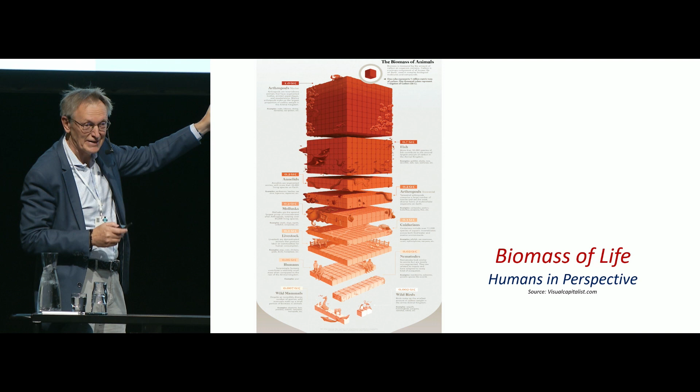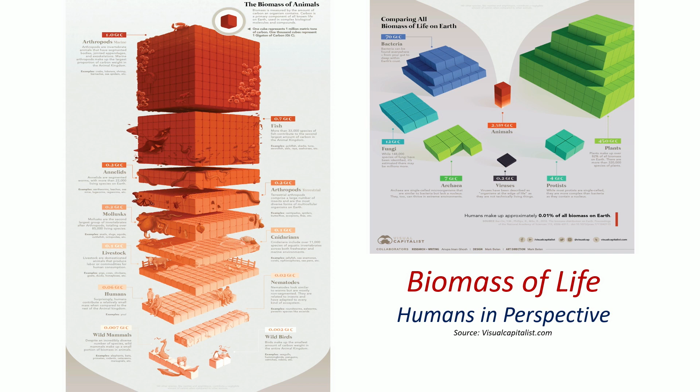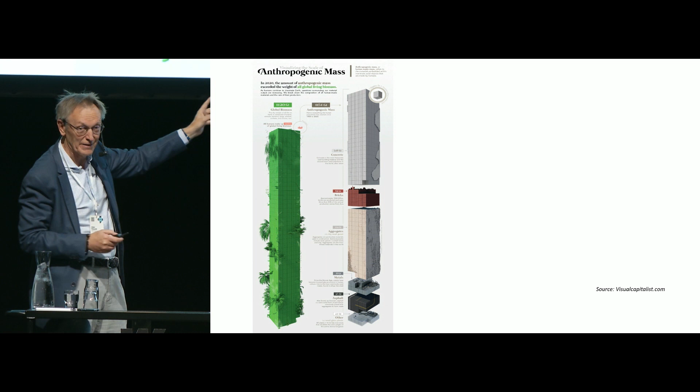This is the biomass of life. You see very clearly here how much is the biomass of humans, wild birds, wild mammals. But that's not actually what I want to show. If you compare it to the biomass of other living beings, fungi, archaea, viruses, plants, you see that animals, if we belong there, are a rather small part of that. But the core message I want to share is that if you compare the whole biomass of life with the anthropogenic biomass, that's the biomass created by humans, we are already surpassing that. You see here concrete, bricks, aggregates, metals, asphalt, and other. And by the way, the housing sector is contributing pretty much to that part of the story.

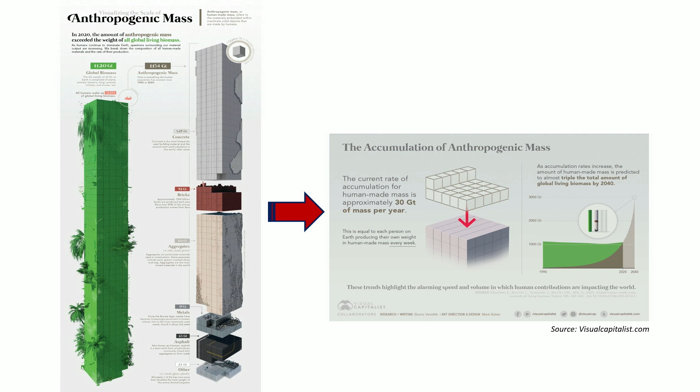If the trends continue, by 2040 we can expect that the right column will be 3 times the height of the left column. So we have all learned, and practically everybody has heard, about the doughnut compass for human prosperity.

We know that the inner part represents basic human needs, which is of course expanding due to economic development, and the population is also growing. The outer part represents the planetary limits, and we are surpassing those planetary boundaries.

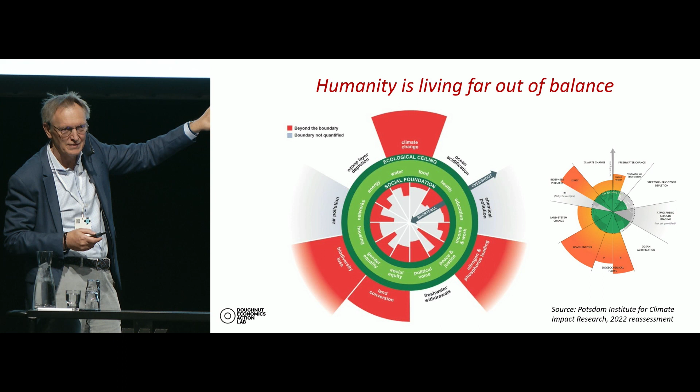The latest data actually show that things are worse than when this was initially identified. But if we look at it through the country story, the situation is pretty much different. You have countries like Malawi, which are far from surpassing planetary boundaries, but of course they are also not well meeting social needs. Then you have China, Belgium, Australia, where each country is basically overshooting the planetary boundaries more.

But let me now integrate that a bit into the story we are covering in the International Resource Panel. It's the story linked to natural resource management. When we say natural resources, what do we talk about?

Biomass, metals, fossil fuels, and non-metallic minerals - we call everything materials. So materials, it's everything extracted from the earth. And then on top of that, you have water and land. So that constitutes the story of the natural resources.

If we look to the trends, this is from the Global Resource Outlook 2019, then we can draw three simple conclusions. One is that global material use has more than tripled in the last 50 years. It has almost doubled on a per capita basis, which means the majority of the tripling can actually be linked to economic development, but of course the growth of population is also an important factor.

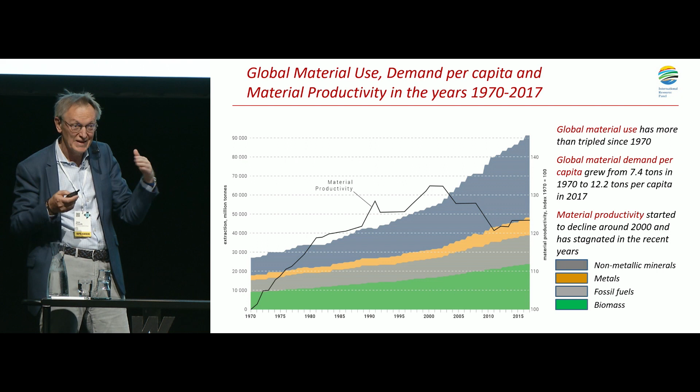Because there was a structural shift. The things which you are buying, wearing, were before more produced in resource-efficient countries, now like Europe, like Japan. Now they are more produced in resource-less efficient countries. And of course, this has consequences on the resource use.

So when we analyzed the impacts of materials in the value chain of extraction and processing, we found out that 90% of land-related biodiversity loss and water stress can be attributed to that. You can see here it's practically connected to the green part, so to the biomass story. Second, 50% of global climate change impacts and one third of the air pollution health impacts.

So if you buy a car, park it, don't use it for its whole life, you have already created one third of the pollution, because resources need to be extracted and the car needs to be produced. So if the trends continue, global material consumption is predicted to double by 2060 - so in less than 40 years.

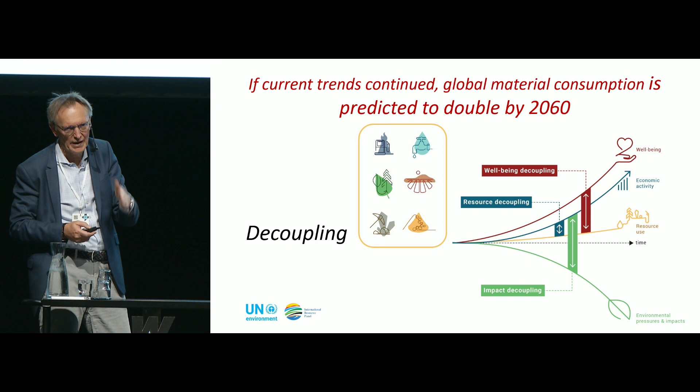That's why our conclusion in the IRP is very simple. We need to decouple - decouple well-being growth, economic growth from resource use, and both from environmental impacts. Which leads me to the conference, why we are sitting here. It's about circular economy, and circular economy is simply an instrument to deliver decoupling.

But you should also see it as a kind of normalization of our economics. So it's basically part of a bigger economic, societal, and cultural transformation. If we want an economy aligned with the European Green Deal and Sustainable Development Goals, it should be circular economy. None of the other economies actually fit into that.

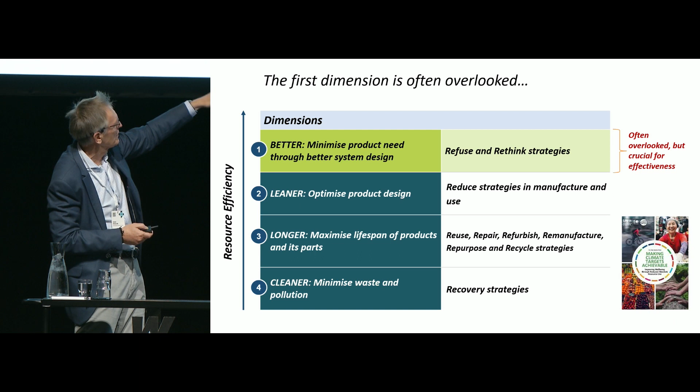When we look at circularity, we can see there are different layers of circularity and understanding. Everybody in the room has probably heard that when we talk about circularity, too many times we land in recycling. But there is more than that - you can go from repurpose, reuse, repair, refurbish, reduce strategies, then to refuse and rethink. So how can we basically do things differently, which is pretty much overlooked.

Since I started the whole story of circularity in the European Union, at least when it comes to political initiatives, our first initiatives were focusing on waste, pretty much how to improve that. Then the recent commission went to the area of products. We are not yet in the real system change, if we are honest.

So if I translate that to today's topic, managing waste related to buildings is our attention. Optimizing construction and building is in our attention. Efficient and balanced space and optimized building utilization - it's not yet. So we need to connect the things, we need to connect the questions.

And when we are doing that, one of the essential questions you should ask is: actually we don't need buildings, like we don't need cars. We need mobility, we need space to live. So it's really important that we understand, and that we design our thinking and logic, through human needs.

And those which are most resource intensive, those which are most impacting climate change and biodiversity loss, are nutrition, housing, mobility, and consumer goods. And then you have the supporting, very resource efficient systems which are enabling us, which use directly nature, energy, materials, innovation, digitalization - all that connected in a very important part. So built environment is part of the core problems which are causing climate change and biodiversity loss, full stop.

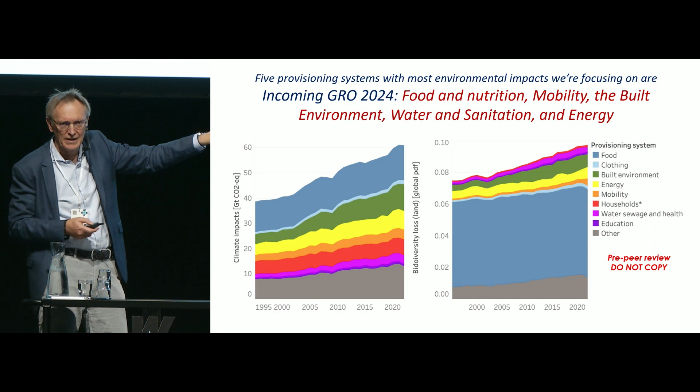And these are the last two slides. This is actually a teaser from an incoming report, the Global Resource Outlook. We will release it in the beginning of 2024.

We are not looking anymore through the sectorial logic. We are looking through the needs of humans. And we have modeled everything and connected everything. You can see on the left-hand side how the built environment, the green part, is contributing here to climate change.

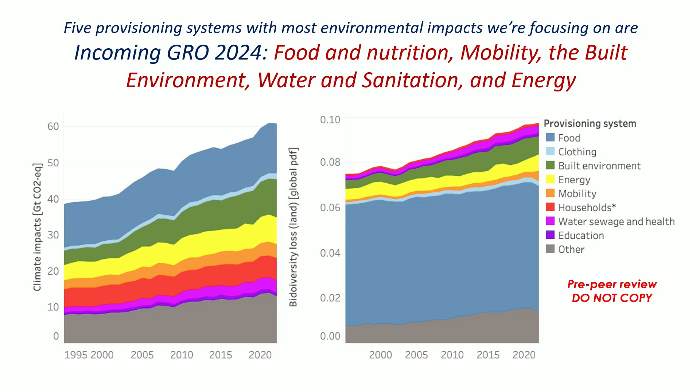What are the trends? On the right-hand side, how much it's contributing to biodiversity loss. If you look at the high-income country story, high-middle-income country story, middle-low-income country story, and low-income country story, we will depict the whole story of how things are connected to human needs and how it's connected to fairness and equity, and what needs to be done.

And Julia will now talk more about that, what could concretely be done in the housing sector. Thank you.

Wonderful, thank you Janez. So let's look more closely at the actual built environment. How does this logic apply? The essential question Janez leaves me with now is how to meet the essential human need of quality housing in the most energy and resource efficient way. And that's why we're all here.

It comes as no surprise to you that a fundamental solution in our mind is the circular economy, and the deep systemic circular economy, as Janez has just alluded to.

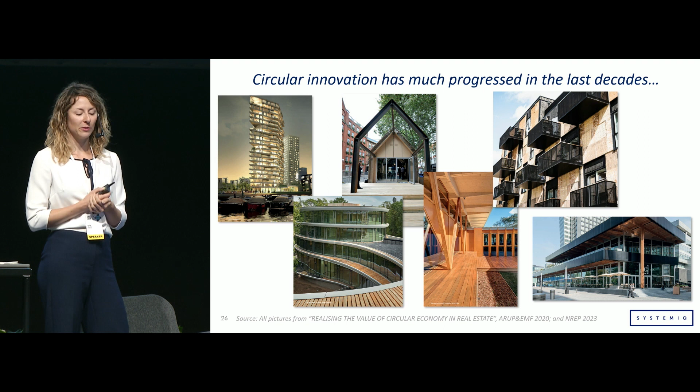The question is, though, if we have all these amazing innovations going on, and there are also statistics that show every dwelling is getting more energy efficient on average in every country in Europe - I'm not sure globally - why is it that overall, in this global view, housing is growing so fast in its resource use, actually growing faster than any other provisioning system or sector, however you want to see it.

So clearly we have two diverging trends here. We are making progress in circularity, and we need to acknowledge that. It's amazing what we're seeing, but it's not really hitting home yet, you could say. And I'd say there are two reasons - you can split that up into different categories of rationale, but it's basically scope and scale.

If we look at scale, we see that obviously it's not mainstream yet - it's not like every building, renovated or constructed, will incorporate all these amazing principles yet. I won't dive too deep into that because we have an expert on the panel, or several experts on the panel later, and the Arups and Metabolics and so on of this world really know all about this.

I will talk about the systemic scope that is missing. I think we have analyzed this in basically any climate policy, resource strategy, and so on, and we see investment strategies also very importantly taking up the logic that Janez just explained about the systemic view that now we need to apply.

And that is really right. It's those two dimensions, really, when it comes to better utilization. How do we get to build nothing? Doesn't sound very attractive, building nothing, but there's actually a lot behind that.

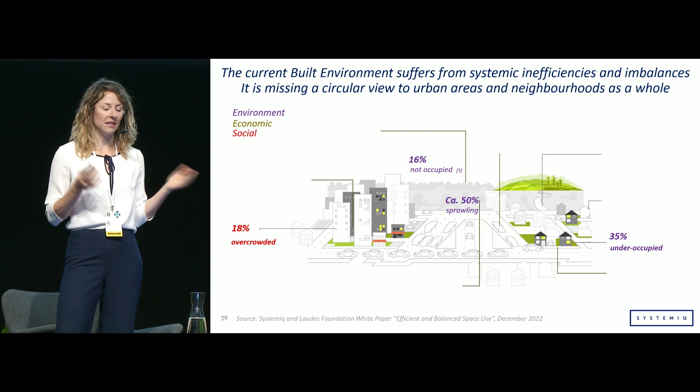So we see that a lot of our built environment is underoccupied, rooms are just not being used. Some is not occupied at all, it's vacant, maybe decaying. About half of our built environment is sprawling out, really inefficient in its composition. And then obviously that flips over on the other side, where we have overcrowding or missing houses, what we call the housing crisis. And that just causes a lot of excessive material and energy demand.

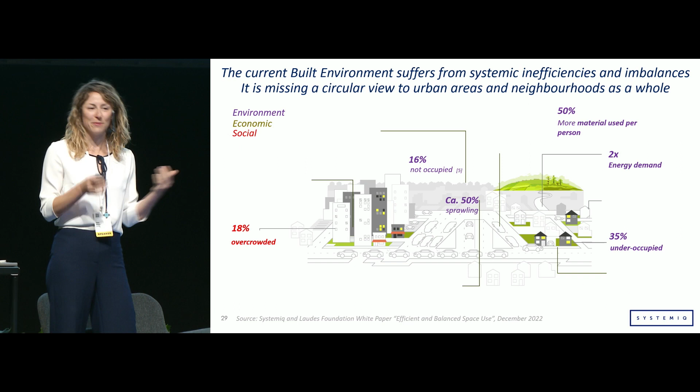We see that, for example, single-family housing areas use on average about 50% more materials and twice the energy, also because they're more underutilized, but it goes beyond just the buildings directly. It causes infrastructure that is much more extensive, much more material intensive. So roads and inefficient space use are up to 10 times the length, and this is European Commission statistics.

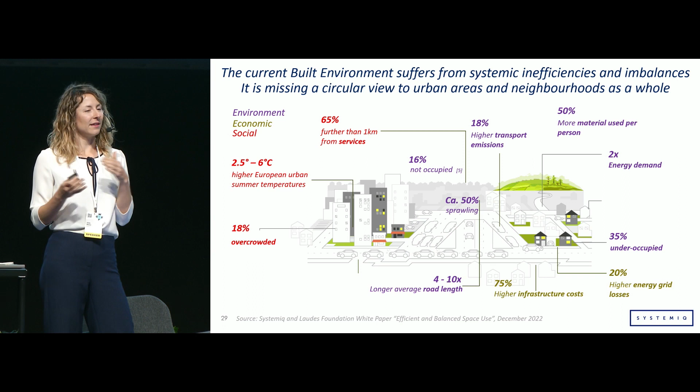It's not something we have measured, and that also causes social impacts. For example, a lot of settlements miss or lose the minimum density to have accessible services, which then causes more transport emissions and so on. So it's really about combining this utilization view with what I think is more classically perceived as circular construction.

What we have done is looked at if you applied sort of perfect circularity to every element on its own without improving the system, how far would we get? We modeled that for cement and steel and so on. I'm not showing all of that, to my great pity, because we don't have time, but it's actually interesting because you can really see the big emissions gap. You just can't get to the ultimate outcome without the systems view.

And then we applied the systems view and basically thought, okay, if we take what is going on now in terms of how we use space and utilize buildings towards a theoretical optimum, what would happen? We saw that you can save about 45% of annual construction emissions, so embodied emissions in road and building construction. And obviously that is something we need very urgently, because it's probably no secret to you that most of the materials used in the built environment are really hard to decarbonize or de-impactize in any other way.

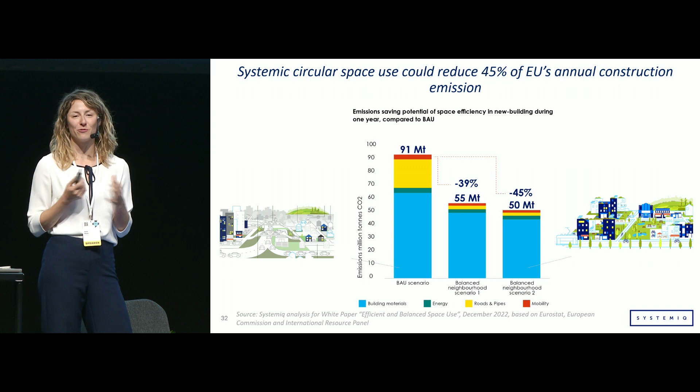It's really hard to make low carbon cement if possible at all. And it's also quite difficult to recycle it. So it's really about those other more systemic levers.

Luckily, even though they're not necessarily called circular, we could find quite a few examples where this is being applied quite nicely. So the more classical circular economy with that good space use, many of these examples are known to many of you. I think Switzerland, Barcelona, these are famously well-managed environments.

I think Freiburg is a very interesting example because this Vauban area is a suburban area which reuses buildings, but at the same time has this density and circular space use, repair cafes and shared shops and so on. So really a systemic view, which doesn't very often happen in suburban environments. We had trouble finding examples, so I think this is a very interesting one.

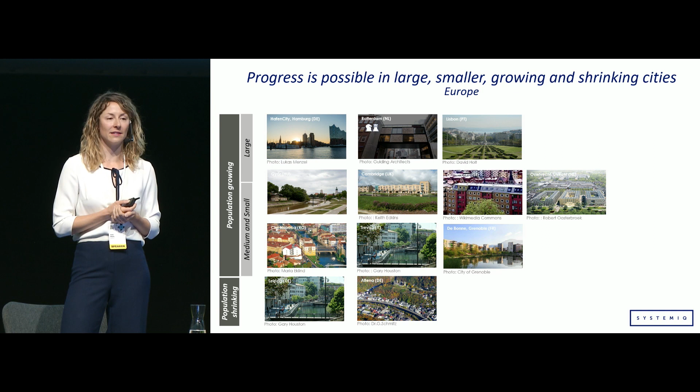And we found lots of other pocket examples all over Europe, and again, I look forward to expanding this example set a bit beyond Europe. None of them is perfect yet, but interesting enough to really get inspired and then also inspire our investment strategies, legislation, and so on. And wow, I have one minute left, so it's quite well timed.

I will end with this, but there's still quite a lot of information here. So the conclusion is obviously not to do either or, right? It's to do it together. And actually, we have seen in many examples that this more urban view, circular space use, and the more classic circular construction techniques, they can really boost each other. And it's really, while it sometimes sounds a little bit vague and big, when they go hand in hand, there is a lot of momentum being created.

Maybe to go into that for my remaining 40 seconds. So you see that many of the actions we need to do to boost circular space use are also probably very known to you as classic circular construction strategies, right? We are revitalizing city centers wherever compact living is already existent or has high potential. And to do that, we need a lot of urban planning and investment, things that go beyond the classic circular agenda.

But we also need the quality upgrading of buildings, the retrofitting, the repurposing of vacant buildings. There's a lot around upfill and infill of lower density areas, so they can become interactive, vibrant hubs. Someone made a fun calculation, and calculated how you could accommodate the whole of Brussels' projected future population on its rooftops through timber rooftop extensions, and that would apparently, space-wise, be quite easily possible without sealing any extra land.

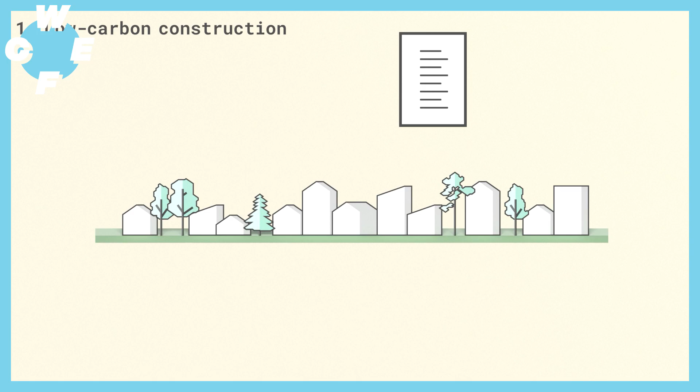In Finland, the new Construction Act enters into force in 2025. The Act promotes circular economy in the built environment in four main ways: low-carbon construction, life cycle quality, reuse and recycling, and digitalization. The new Act steers towards low-carbon construction by accounting for both negative greenhouse gas emissions and positive climate benefits throughout the life cycle of buildings.

In practice, the building permit application must include a climate declaration, which includes the carbon footprint and handprint assessment. Limit values will be set for carbon footprints for major building types. The assessment also includes embodied carbon, which will promote the use of reused and recycled materials in building.

The Act also promotes the life cycle qualities of buildings. In the future, buildings must be designed to be adaptable and in use for a long time. The ability to dismantle and reuse materials must be taken into account. Detailed criteria to assess these qualities are to be developed.

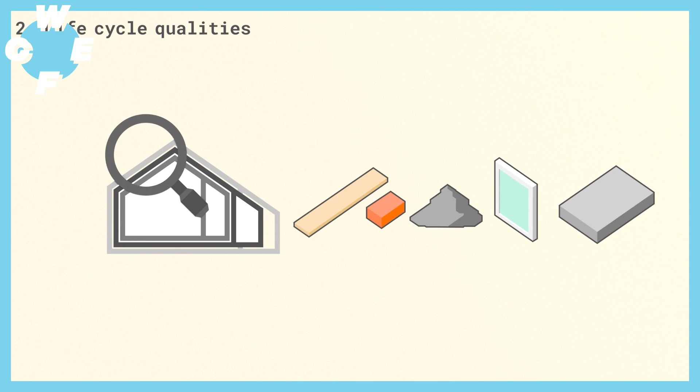The Act supports the market for deconstructed components and materials by requiring digital pre-demolition declarations. This improves statistics for construction and demolition waste and increases opportunities for reuse and recycling.

The Act provides the foundations for digitalization. The use of building information modeling will be the primary process for design and for building permits. Up-to-date and easily accessible information about buildings and materials promotes circularity. Finland is aiming for a comprehensive built environment information system by 2030.

We all benefit from the circular economy in the built environment. It mitigates climate change, reduces waste, and creates new business opportunities for the future.

Great. Yeah, let's have some applause. So there we just saw a bit of an example speaking to some of the points you mentioned, Roland, on this life cycle approach, creating that marketplace.

Julia, turning to you, what do you think is the role of legislation in driving circular economy more broadly in the built environment?

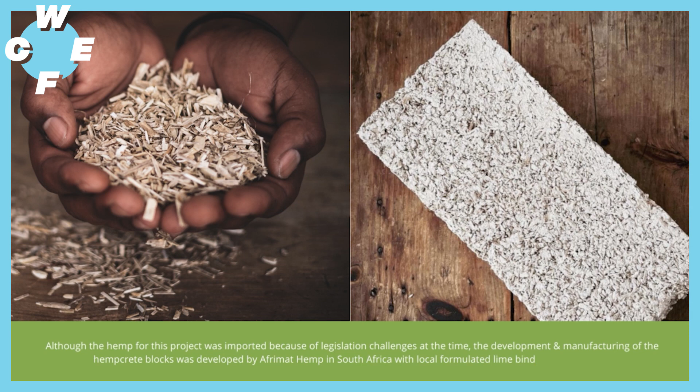Hempcrete is a building material made from the woody core of the hemp plant mixed with lime and water. It's a sustainable alternative to traditional building materials, which are responsible for a significant amount of carbon emissions. And it's gaining popularity as a circular achievement due to its unique properties and applications.

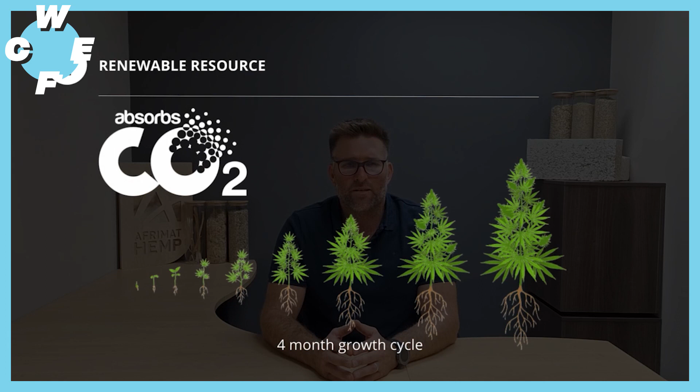Firstly, hempcrete is a renewable resource. Hemp plants grow quickly and require minimal water and pesticides, making it an ideal crop for sustainable farming. The plant absorbs large amounts of carbon dioxide during its growth cycle. The woody core, which is typically discarded, is used to make hempcrete.

Secondly, hempcrete is a highly energy efficient material. It has excellent insulating properties, meaning buildings constructed with hempcrete require less energy for heating and cooling, reducing energy consumption and carbon emissions. Thirdly, hempcrete is a circular material, meaning it can be reused or recycled 100%.

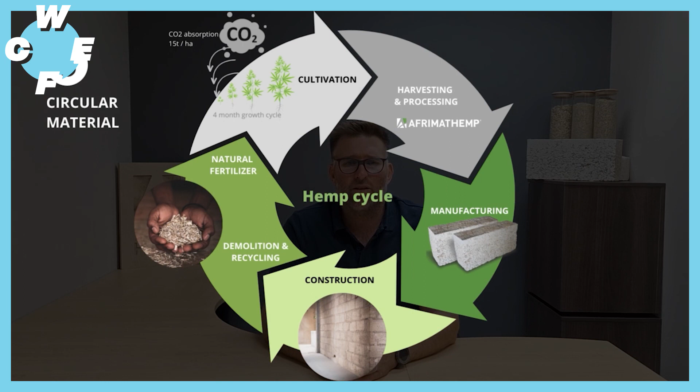Unlike traditional concrete, which is difficult to recycle and often ends up in landfills, hempcrete can be crushed and used as a soil conditioner, returning valuable nutrients to the earth.

Furthermore, hemp farming and construction with hempcrete provide employment opportunities for rural communities. It also reduces dependency on fossil fuels. A good example is our locally designed mobile end-processing and decortication unit, which will start processing for rural communities as of July this year.

Between our farming operation and block manufacturing plant, we have created 28 jobs so far.

Our studies have shown that adding hempcrete to soil can increase water holding capacity by up to 48%, improve soil aeration and drainage, and boost nutrient availability. Hempcrete can act as a slow-release fertilizer.

Our initial lab studies have shown that our hempcrete has a 53% potency in comparison to our agricultural one. Further testing is still ongoing.

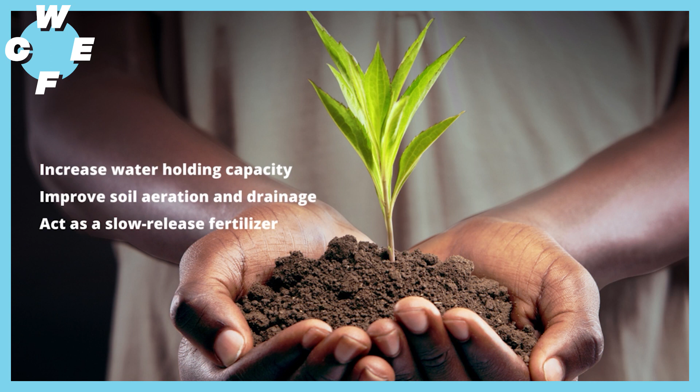A thought to the panel: for us as a society to make a real impact on climate change, we must scale solutions like the implementation of hempcrete in the construction sector, similar to the scale of the Harrington Street project here in Cape Town.

That was an exciting example about hempcrete from South Africa. That's one solution that people are taking on board when we're thinking about building new and circular economy.

Ashraf, can I ask you, what do you think are other key considerations we should be taking when we're building new? First of all, thank you for giving me the opportunity to be here, and thank you to the government of Finland.

In our institute, the Housing and Building Research Center, we are the technical arm of the government. We are affiliated to the government, but we follow research-based and applied research-based methods in our work. We have developed applied research in some arid regions in Egypt.

Let's say it's the far south of Egypt, near Sudan, where it's a very arid zone. Temperature reaches 56 degrees Celsius in summer, and humidity is only 8%. So it's very hot and very dry, and very sensitive to building materials.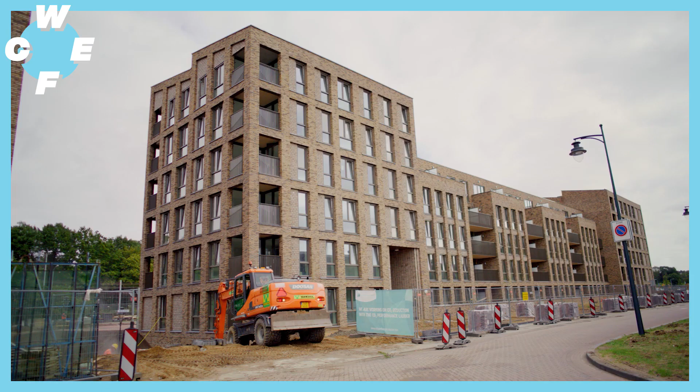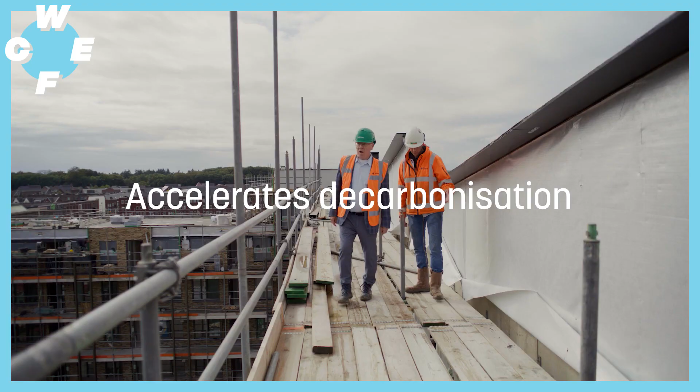The CO2 Performance Ladder is a sustainability tool. It is both a procurement tool and a management tool. The CO2 Performance Ladder is a working method for us, a management system to ensure that we as a company are also actively working on making our business more sustainable. The main success factors of this CO2 Performance Ladder are that at low cost, an enormous amount of avoided CO2 emissions is achieved.

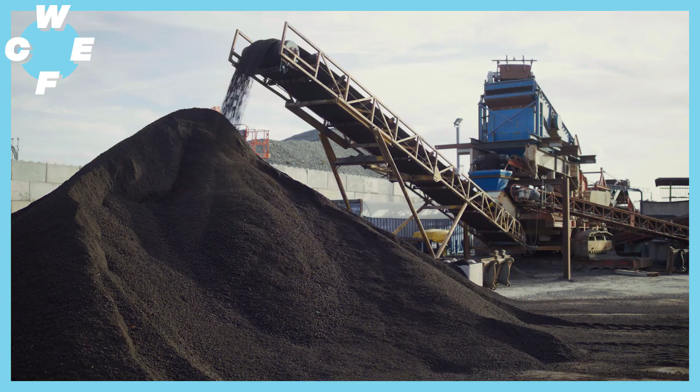As a company, we really want to be frontrunners, and a certificate helps to create a mindset in the organisation to do more to reduce CO2.

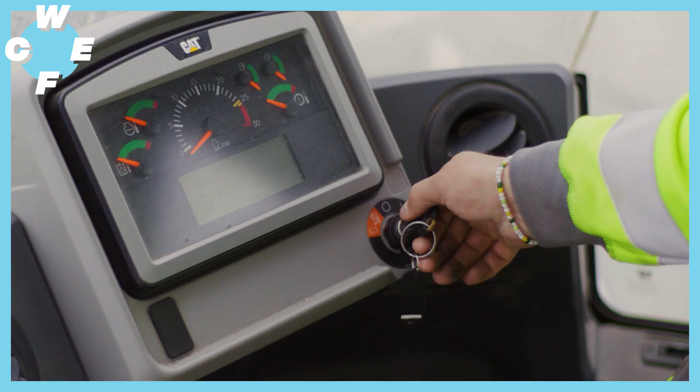The 5-step system allows a company to grow in its CO2 ambitions and at its own pace, and that actually makes it very accessible. And it also stimulates cooperation with chain partners.

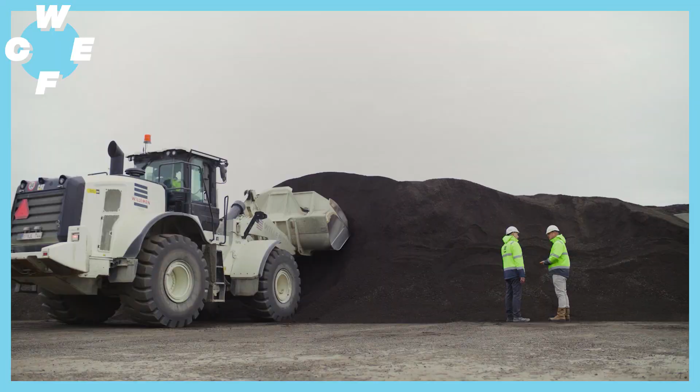And at a moment like that, you are not looking for abstract stories, but you are looking for a concrete instrument that you can work with which you can show that it is meaningful and that it makes a difference.

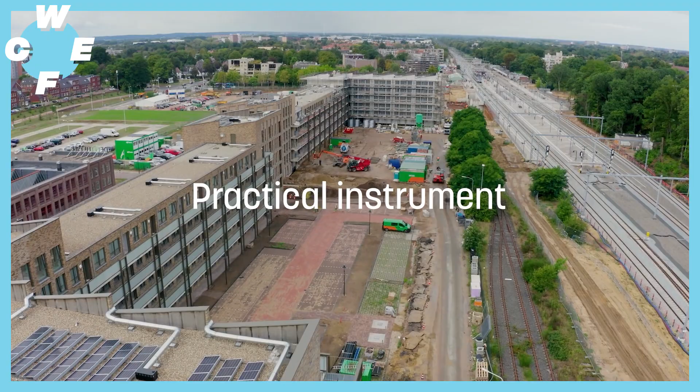The most important success factor of the ladder is the fact that you get a fictitious discount on the tender. That is an important aspect for both contracting authorities and contractors.

So we had an example there about the CO2 performance ladder. Ashraf, in some of your work, you've been in this procurement space a little bit. What do you think is the value, or how have you experienced procurement playing a role in enhancing circularity? Through a project that I manage since 4 years and will last for more 2.5 years, funded by the German Ministry of the Environment, is related to net zero emissions in the building sector.

And to make it easy, we choose to work for the newly constructed projects. Not neglecting the existing, but rather to go further to a quick achievement on the newly constructed building.

We issued a web-based tool called BIP Tool, Building Energy Performance Tool, based on the European Union tool that had been Egyptianized to work with the local conditions and local materials, and to achieve a fund from a supporting bank like EBRD or the Central Bank of Egypt, you have to pass through this tool.

The world has woken up to the climate crisis, the effects of which are already being felt. One of the largest contributors is the built environment. To realize a net zero and nature-positive future, the building industry needs to reduce the impact its demand for products and materials is having on the planet. The circular economy is critical to achieving net zero, as well as reducing the use of virgin materials, capturing long-term value, increasing resilience, reducing waste, and creating new economic opportunities. So, how can we realize the benefits that the circular economy has to offer?

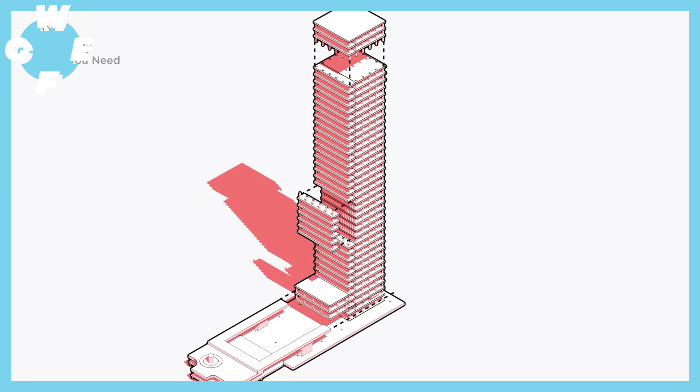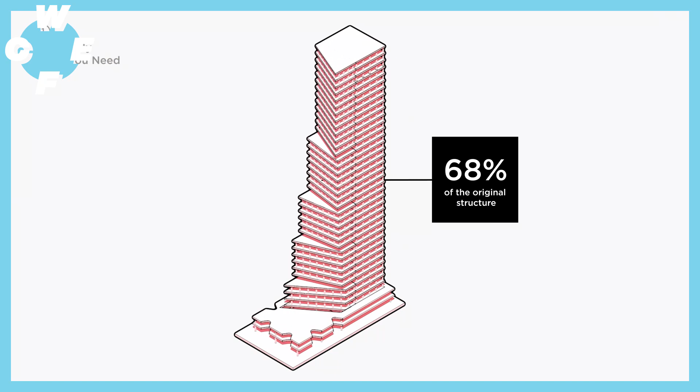A framework built around 4 principles is designed to help the building industry tackle global challenges at every stage of a project's lifespan. First: build only what you need. Do we need a brand new building? Instead, we can reuse, adapt, or transform existing buildings to meet future needs. Quay Quarter Tower in Sydney was built around an existing core, retaining 68% of the original structure, reducing the requirement for new materials, which saved 12,000 tons of carbon and $130 million.

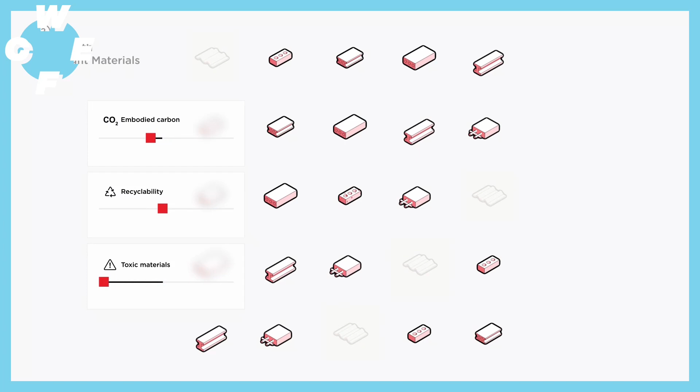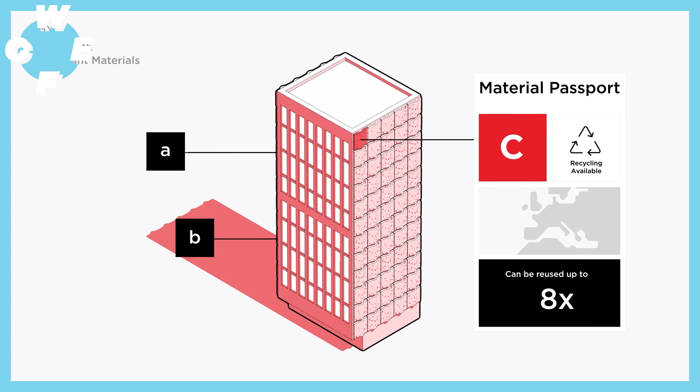Build with the right materials. When we do build, we should use renewable, bio-based materials, or those with a lower embodied carbon. We should track and set targets around material use, collecting data through material passports, which allow them to be recovered and reused in the future.

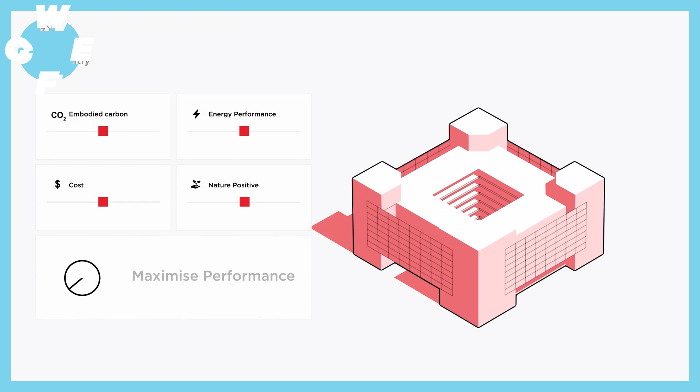Build efficiently. There are opportunities to save carbon and cut waste with every decision, no matter how small. Designers for One Triton Square in London adopted a marginal gains approach, analysing every system and component to maximise performance, resulting in a saving of 40,000 tonnes of carbon and a 43% reduction in costs.

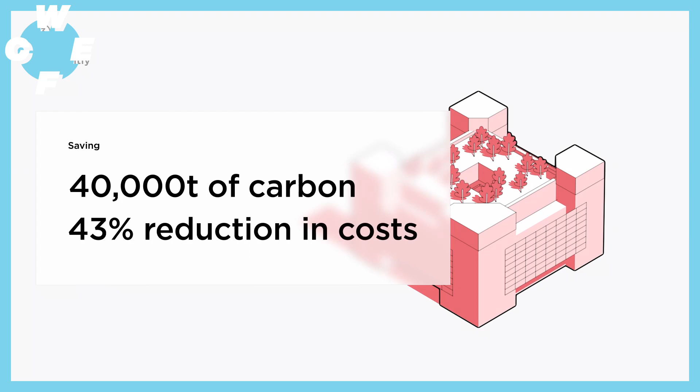Build for long-term value. Buildings don't last forever, but their parts can be reused. Brummen Town Hall in the Netherlands was designed to be dismantled after 20 years. Selecting prefabricated timber components and avoiding difficult-to-recycle materials allowed for 90% of the original building to be reused, turning it into a material bank for the construction of future buildings.

The building industry needs to adopt a circular mindset across the entire project lifespan. Through strong leadership, collaboration, innovative circular business models, and digital technology, we can transform the industry and achieve a net zero and nature-positive future. Search for the Circular Buildings Toolkit.